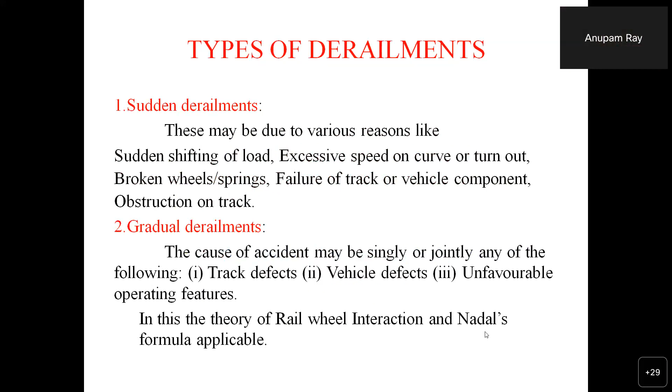So sir has already given a brief introduction about me, so I will also give some more introduction. My name is Srinivas Rao. I worked as a breakdown in charge for about 10 years in Mysore division especially, where we have different stock like MRV, that is ARMV, we have ART, and we have a 140-ton crane. So all these facilities are there. I was the in-charge for the ARMV as a depot in-charge also, and I maintained that stock.

So in railways, as you are aware and attending this class, derailments, accidents happen. Am I audible to you all?

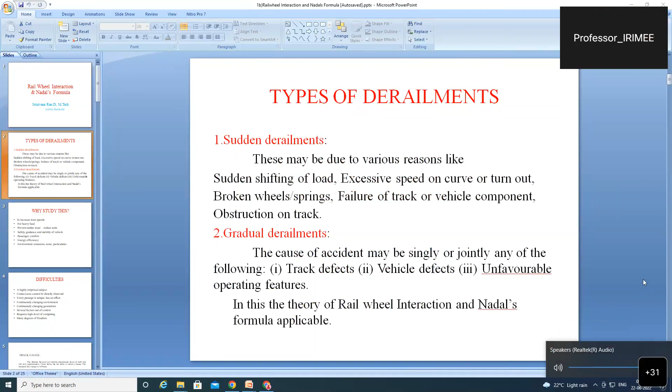Yes sir, audible, but the sound is having noise. Sound is not clear. Please check from your side. Sir, the sound is very clear from your side. Okay, the sound is quite clear. Please mute your microphone, others please mute your mics so you can clearly listen to my voice. The sound is absolutely clear, Mr. Srinivas, please go ahead.

Okay sir, please start. Right, so in our railways, derailment is a common phenomena.

Once a derailment or accident has happened, the next step is the ARME staff has to reach the spot. After reaching the spot, they will form into different gangs. I'm talking mainly about mechanical, so different gangs. One gang of supervisors and staff will concentrate on re-railing work. Another gang, if any passengers are involved in the accident, will focus on their restoration and then producing them before the qualified doctor. This is the work we are doing.

Apart from these two, there is another work called joint readings. Joint readings means the readings at the time of the accident, how they were, and what may be the reason for the accident cause. This is also another important area. Those involved in the breakdown specials, both officers and supervisors, have to concentrate on whether the problem is with the wheels, with the track, or any other issue, which may be a natural calamity or some boulders fallen or any breach.

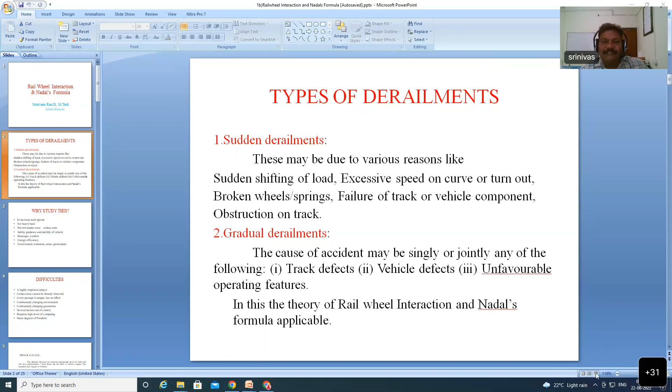So like this, various reasons are there to find out the cause for the derailment. In order to find out a cause for the derailment, everybody must have some knowledge on topics like rail wheel interaction. This is the basic topic we are going to discuss now. It's a basic topic for all engineers, especially mechanical, and any engineer can learn these things perfectly about the derailment phenomenon or cause of the derailment. Before coming to that picture, you must understand minimum basic knowledge on this.

Derailments are generally broadly classified into two varieties: one is called a sudden derailment, another is called a gradual derailment. Sudden derailment means it will not give any clue, it will directly fall.

Due to sudden shifting of load, excessive speed on a curve or turnout, broken wheels or springs, or a track utterly failing, or any vehicle component, or any obstruction on the track - these are all some of the reasons for sudden derailment.

Sudden derailment can easily be identified - what was the reason for this derailment? Many times we can give the prima facie reason immediately for sudden derailment.

But to arrive at the cause of derailment, gradual derailment plays an important role. Gradual derailment means the wheel will mount over the rail table, then move a certain distance, then after that it will derail. So we will have both the point of mount and point of drop.

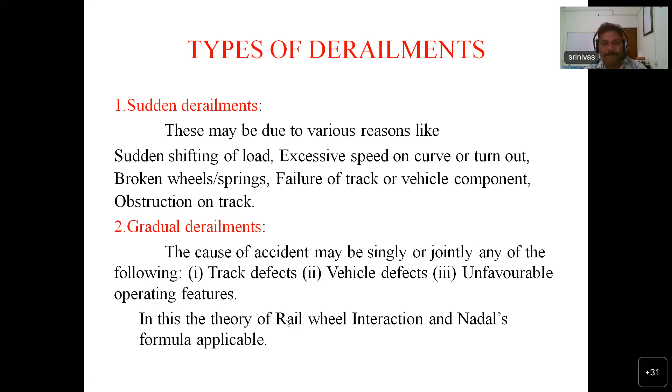What are the effects, how does it come out from the rail table? These things we are going to discuss in today's class. To understand better, you must have minimum knowledge on the wheel and minimum knowledge on the rail also.

For those who already know this, it is no issue - for those who don't know, you may get some additional information. Please try to understand, it will not be repetitive for you.

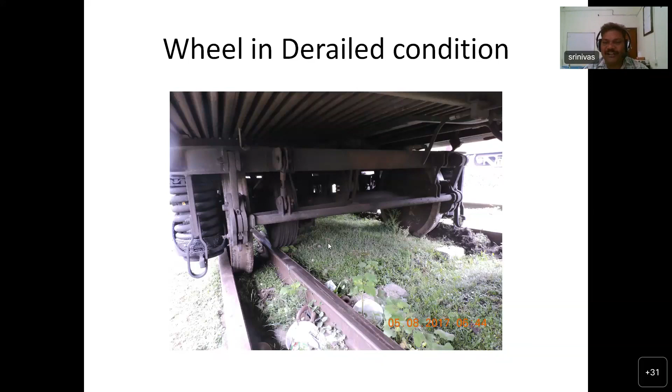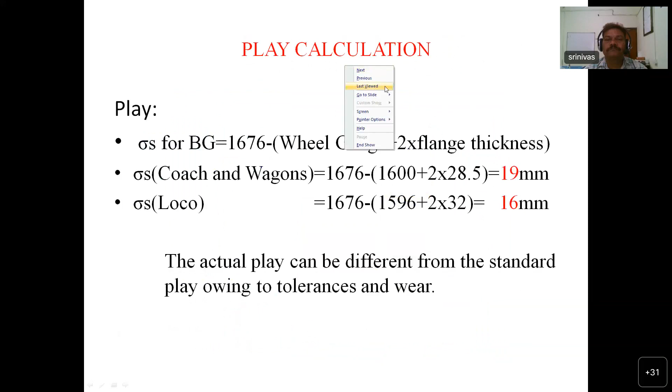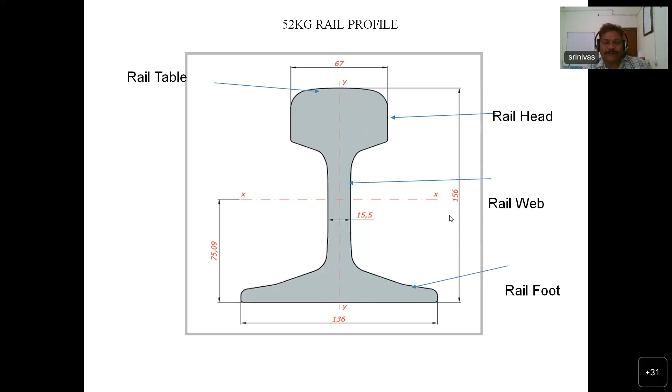These are all flat-footed rail - from the last 20-30 years only we are using this. Earlier there were different types of rails. In Indian Railways we had different varieties, and one important variety we'll discuss now.

One variety of rails is called 52 kg rail - this is the 52 kg rail we are seeing now. But strictly speaking, it's not correct to just say 52 kg - we must specifically say 52 kg per meter rail. That means for a 1 meter length of rail piece, if you weigh it and it comes to approximately 51.9 or 52 kg in that vicinity, then such a rail is called 52 kg per meter rail.

Nowadays the railway board has taken a decision to withdraw these 52 kg per meter rails, and they have started introducing one more type called 60 kg per meter rail. This is the present day trend going on - 60 kg per meter rails are nowadays being used.

So 52 kg per meter rails, if their life is completed, should not be replaced with 52 kg again - they have to be replaced with 60 kg per meter rails only. In 60 kg per meters also, one more modified version is now coming.

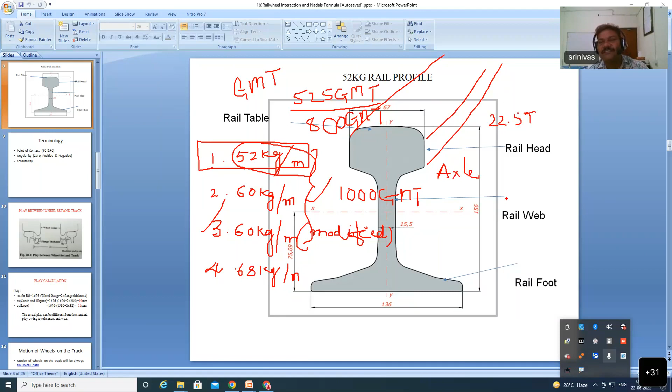One more important point to note is that 52 kg per meter rails have an axial load capacity. They proved it can take only 22.5 ton axial load. But on paper, they give up to 25 ton axial load capacity. There is a paper on this - 52 kg per meter rails cannot withstand beyond 22.5 ton axial load.

I hope everybody knows what axial load is - let me explain again. Suppose you take a diesel engine, the front truck will have 3 axles and rear truck also 3 axles, 6 axles total. If you take one WAG 9 locomotive, the weight is 132 ton total weight, including everything.

Total weight I am talking, including axles, everything. Upon axles, number of axles is 6. So it comes around to 22 ton per axle. That means you can run these WAG 9 locos on the 52 kg per meter track because it is designed for an axial load of 22.5 ton, so safely you can move.

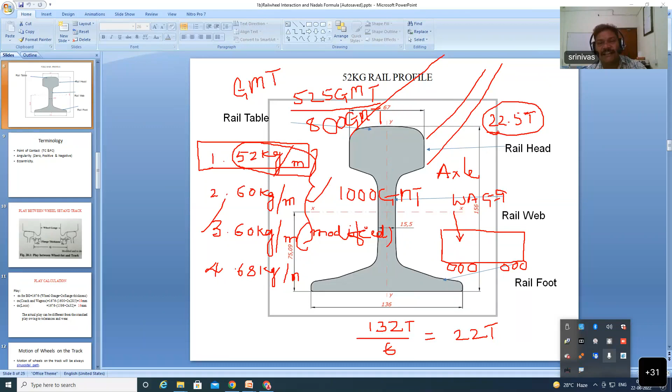Because they are getting doubts as wear and tear and life go on taking place, there are cases of breakage also. That is why they are shifting from 52 kg per meter to 60 kg per meter. This is something like ICF coaches transforming to LHB coaches. So 52 kg to 60 kg per meter - they are transforming, that is the trend nowadays.

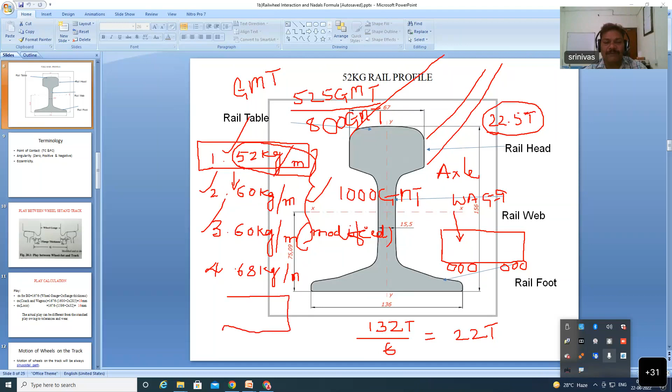Even our wagons also - suppose if you take the example of a wagon, say a box wagon or BCN wagon. The box wagon's empty weight will be roughly 23 ton.

So over this we'll put around 66 ton roughly, so it becomes around 90 ton. That 90 ton will be carried by the loaded wagon, with 2 front axles and rear 2 axles. So 90 ton divided by 4, it will not tolerate this much load. So roughly some 22 point something per axle, so almost we are touching the design capacity of the 52 kg per meter rail. Therefore, sometimes there is a chance of rail breakage or our wheels becoming hot axles. So various reasons come up if you are running almost the designed load.

That is why Railway Board has taken a decision. Hereafter, whatever rails we are providing on Indian Railway track, either for new rails or replacing old rails, we have to adopt 60 kg per meter rails only. So hereafter we will see 60 kg per meter on all main lines. For loop lines and all, 52 kg per meter may still be permitted since their life is still there. So this is one way of understanding the rails - 52 kg per meter, 60 kg per meter and all. I hope everybody is following what I am teaching.

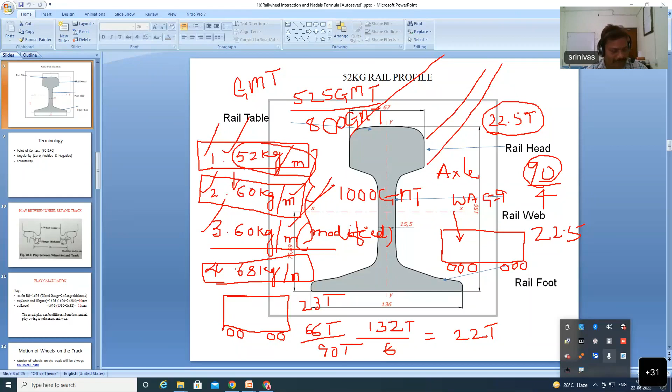So keeping this in mind, what is important for this topic is that you have to understand the various parts of a 52 kg rail profile.

So now I'll call this hereafter as a rail table. This top one will call it as a rail table. The side one will call it as a rail head, this is also similarly rail head. This lean portion, that is called the rail web portion. This bottom portion will call it as the rail foot. So these are the important parameters you have to understand: rail table, rail head, rail web, rail foot.

Then here in the rail head there are also two faces - this is one face, this is another face. These faces also have different names. One is called the gauge face, and the other side is called the non-gauge face. So hereafter I will talk about what is gauge face and non-gauge face.

So gauge face means gauge is measured here only, and also our wheel - for example this is the wheel, this is the wheel - so wheel flange, I repeat, wheel flange will come towards the face of the rail. So that particular face will call it as a gauge face. Where the flange generally sits, the gauge - where the flange will not sit, only the tread area will sit, that is called the non-gauge face. I hope it is clear what is gauge face and non-gauge face.

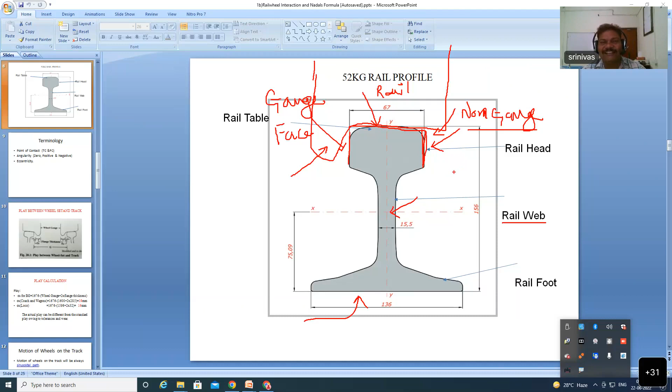Assuming you know what is a gauge face and non-gauge face, how do we identify them by looking at the track? I'll show you.

So in this picture, this is called the gauge face of the rail. This is the non-gauge face of the rail. This is the gauge face. This is the non-gauge face.

Why? Because the flange is on this side. This side is the flange. So for this rail, it will be opposite: the inner will be the gauge face, the outer will be the non-gauge face. So gauge face and non-gauge face should be clear to you now.

First you have to understand what a gauge is and how it is measured, because many of our engineers working in the field are hesitating to join breakdown specials and all. The reason is they are not having much knowledge, many of them. For that reason only I'm telling you.

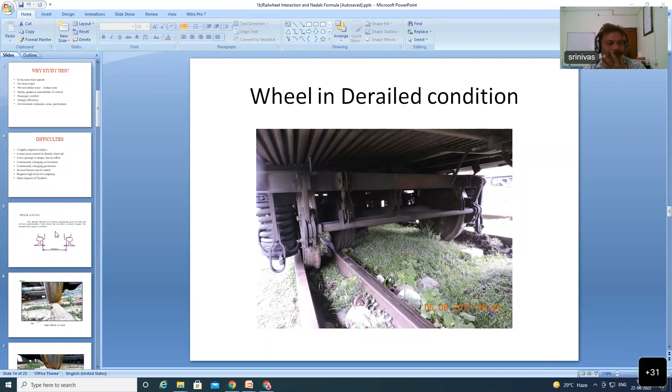So what is a gauge actually? There are two varieties of gauges: one is called track gauge, another is called wheel gauge. First I am talking about what is a track gauge.

Here you have to understand track gauge means this is the rail. You may imagine this is the left rail, this is the right rail. Over this our wheel set is moving. Over this rail, say this is the rail table, and similarly this is the rail table.

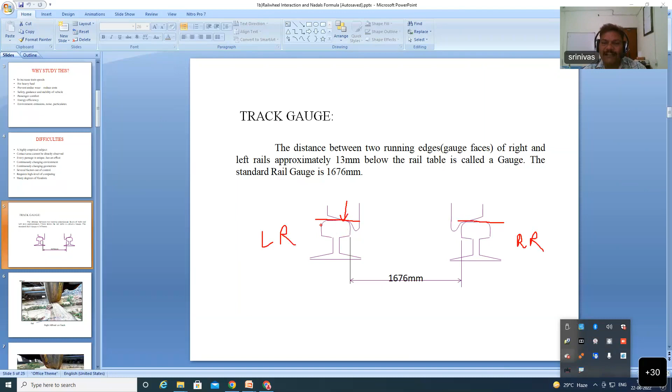From this rail table, 13 mm below, exactly 13 mm, and similarly 13 mm below here. If you make a point at this head area, the rail head area, this is called the inner faces, inner gauge faces.

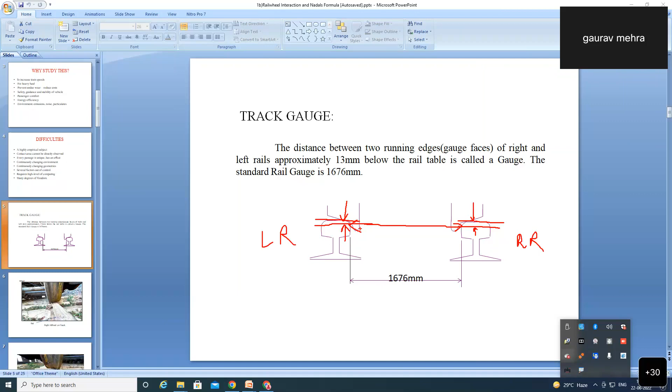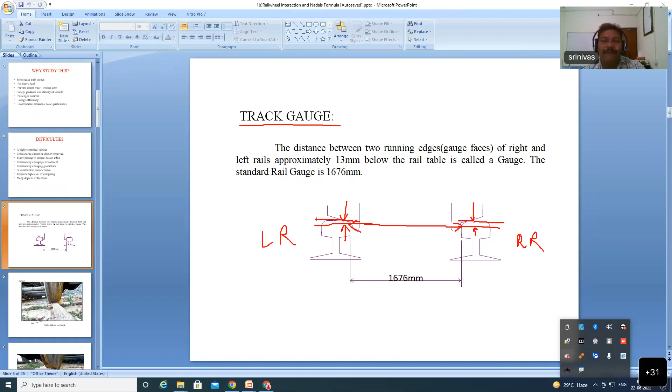I'll repeat. Track gauge - how much is it? Generally track gauge means we'll be discussing broad gauge, meter gauge, narrow gauge and all. Now I'm discussing broad gauge only, not meter gauge or narrow gauge. Whatever discussion is here, I'm making it on the broad gauge. So in the broad gauge, how to measure the gauge - once again I will rub this off and draw it again.

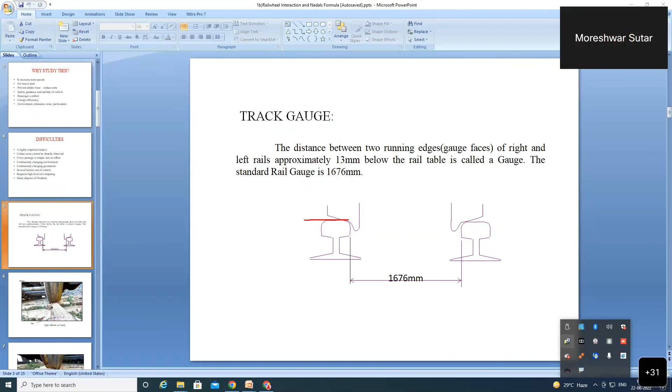Is my annotation visible to you? Whatever I'm writing here, is it visible? Yes, right.

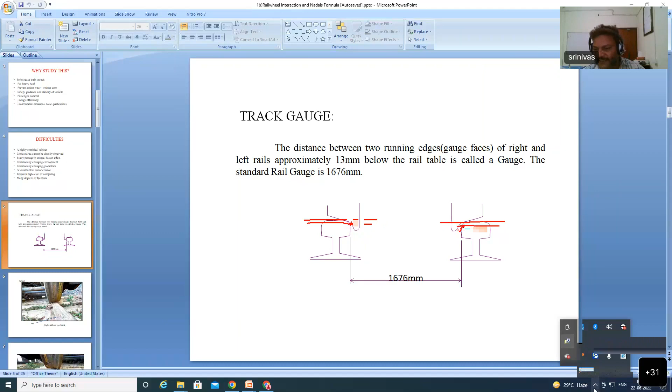So here you draw one line and here you draw one line, just 13 mm below here and 13 mm below here. So you make a point, here one point, here one point. I'll repeat by rubbing this off. Once again I'll mark the point: take a point 13 mm below here, 13 mm below here. Join these two points.

This value must be 1676 millimeters. So on record, this is what they have to maintain - 1676 millimeters is the track gauge they are supposed to maintain. Unofficially, our civil engineers are maintaining even 1673 mm once the PSC sleepers are started, but they are not revealing it. On record, in the books and all, they mention only the gauge is 1676, so here also we'll take it as 1676 only. Off the record, how they are maintaining, we'll leave it to them. So 1676 means it is called correct gauge.

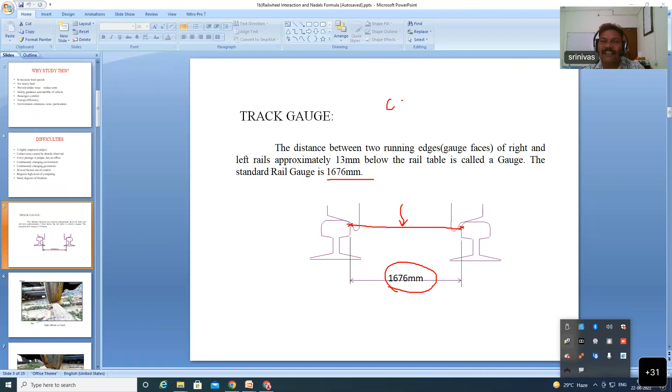Gauge correct means the value must be 1676 mm. If it is there, that gauge is called correct gauge. If it is more, for example say 1680, that means it is more by plus 4 mm, so therefore this gauge will be called a slack gauge. If gauge is more than the standard rail gauge, that will be called slack gauge.

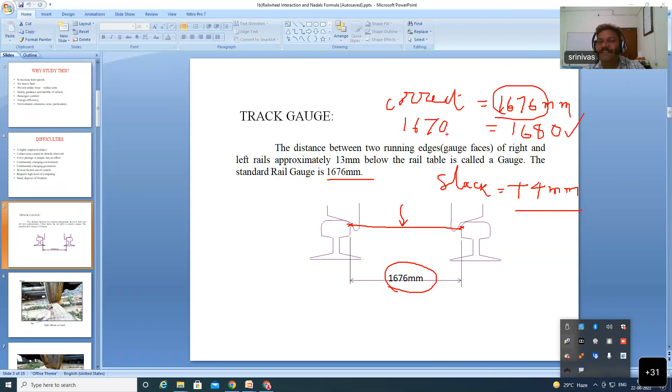Slack gauge means loose gauge, whatever terminology you can use. So slack gauge by how much slack? It is 4 mm. How do you get 4 mm? We are comparing with the 1676 standard gauge. Since we have 1680, it's plus 4 mm more, so it is called slack gauge by 4 mm. Suppose if it is less, say for example you measured 1670, that means minus 6 mm, so this is called tight gauge.

This is called a tight gauge. Tight gauge means it is lesser by some value in comparison with the 1676, which is the standard. So less than this is called tight gauge, more than this is called slack gauge. I hope what is the meaning of slack gauge, tight gauge, and correct gauge is clear to you all.

So correct gauge is 1676. What is the tight gauge? Anything less than 1676, for example 1675, means tight by 1 mm. That's how you have to understand it. So above 1676 we'll call it slack gauge, below 1676 we'll call it tight gauge.

Now in Indian Railways, on straight tracks, the permitted slack is -6 to +6. That means they can give tightness up to 6 and slackness up to 6. This is the permitted range, only on straight tracks.

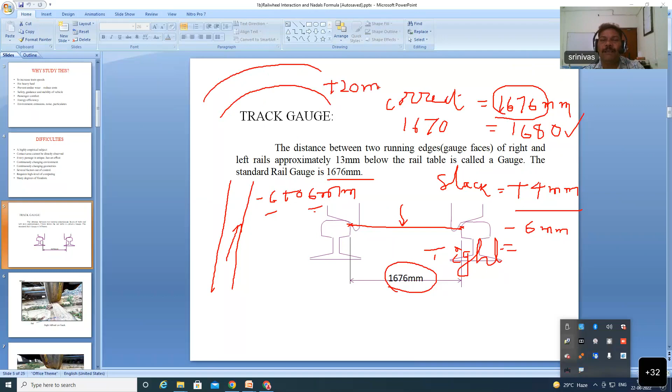On a curved track, this is the inner rail, this is the outer rail. On curved tracks, slack up to 20 mm is permitted. 20 mm slack means 1676 plus 20, so up to 1696 is permitted. Gauges, I hope you understood.

So now I'm able to tell you about what is the track gauge, what is the standard gauge, what is the slack gauge, what is the tight gauge, and what are the permitted limits.

On curve track, how much tight gauge is permitted? On curves, they generally will not maintain tight gauge. If at all maintained, it will be only -6. Normally curves have to maintain slack gauges only, otherwise it will lead to derailments.

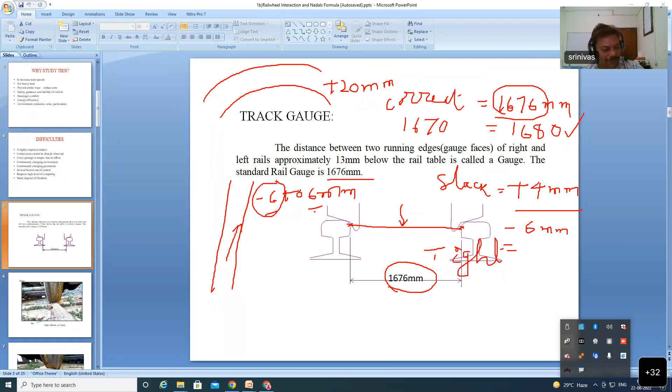I hope it is clear to you, any other doubts? Now I've made you understand what is the track gauge and what is the rail structure and different rails, we have discussed. Now we'll discuss about the wheel also.

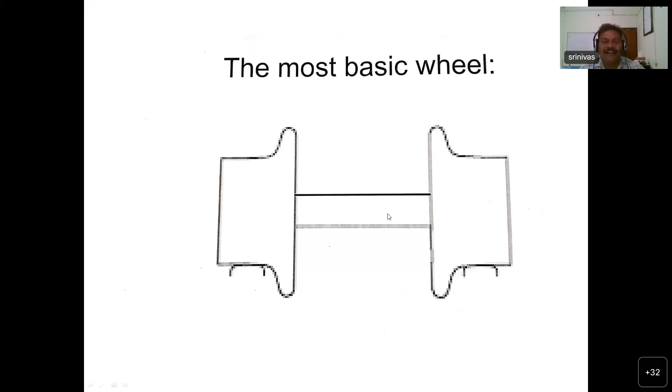This we'll call wheel set. So two wheels will be there, right side one wheel, left side one wheel, and the center axle. This total we'll call wheel set, consisting of two wheels along with the axle, on both sides.

This is called the right wheel, this is called the left wheel. Total we'll call it one wheel set. Once we know what is a wheel set, now we'll discuss what is wheel profile.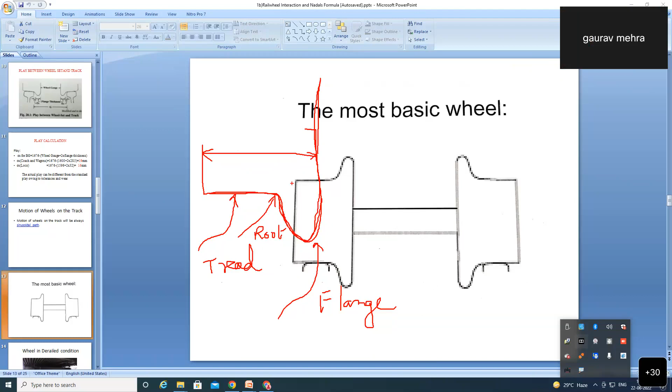Now some more information everybody must know. This thickness, can anybody tell? 63.5 something. Any other guesses? 127, sir. Yes, that is correct - 127 mm. In coaching and wagon, we are maintaining this width of the wheel as 127 mm.

But in the case of a locomotive - I belong to the loco department - we are maintaining 134 mm.

134 mm we are maintaining for this loco wheels and all. Loco wheels, we are maintaining 134 mm of the same value. So actually, initially it was 127 only. So 127 by 2, it will give you 63.5.

So whenever you are asked to measure, in the case of an accident, what is the wheel dia? Wheel dia is to be measured at 63.5 mm place only. You have to measure the wheel dia from this side, okay, this will be 63.5 mm only.

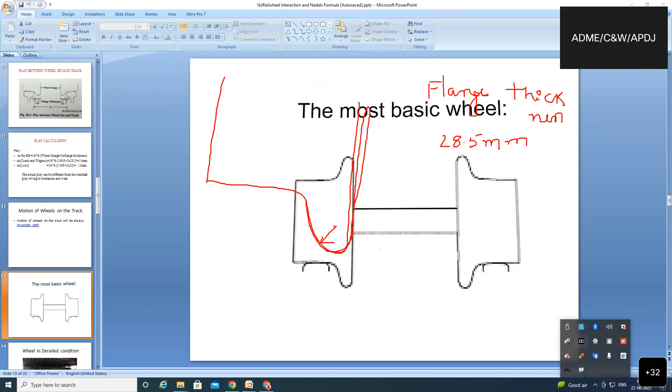13 mm not below the radius, the flange diameter, 13 mm below the tip of the flange. Top portion, say 13 mm below. Actually flange thickness - those who don't have a good concept, please understand. From the tip, this is the tip of the flange. From here you measure the distance 13 mm. Here, say 13 mm here.

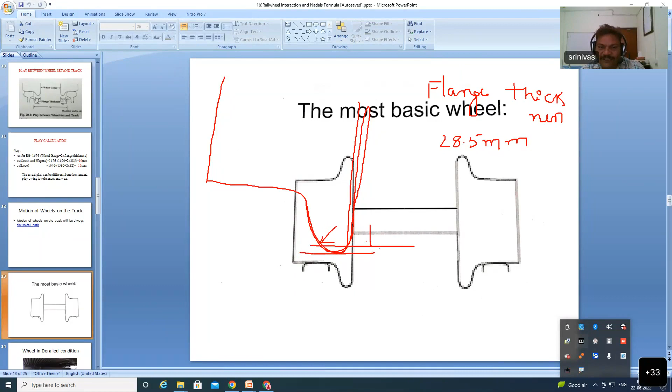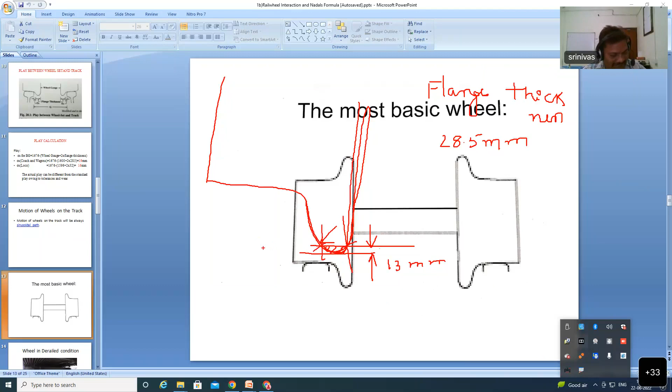This is the 13 mm. If you take a share of this piece, say this one you shear off, so that means imagine only the top piece is available, from here to here only available. So that distance, I repeat, this distance is called flange thickness. I will draw once again so you understand better. So here, 13 mm below. This distance only, flange thickness. This distance only I'm talking about as flange thickness.

In coaching wheels and wagon wheels, the maximum flange thickness we are maintaining, whenever it undergoes the wheel profile, is 28.5 mm. This D value only I'm talking about, that is called flange thickness, 28.5 mm. But in loco sheds, we are maintaining 32 mm, the same value, 32 mm. This is also called thick flange wheels.

Recently this trend has started - recently means last 5 years and all, this thick flange wheels we are starting. This is thick flange wheels.

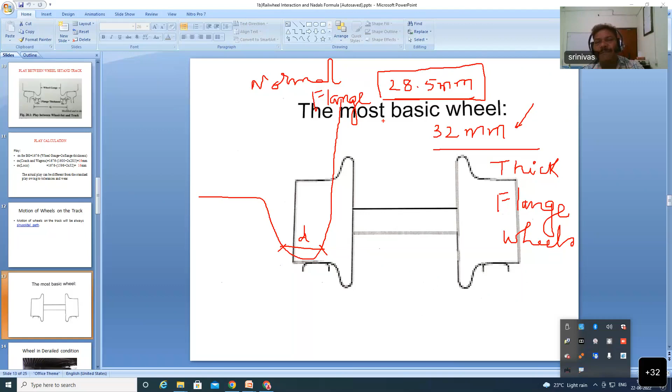Thick flange wheels versus normal flange wheels. Normal flange thickness is 28.5 mm. In coaching stock as well as wagon stock, whenever the wheel is turned, we maintain the wheel flange thickness of 28.5 mm. But in the case of thick flange wheels in loco sheds, we are maintaining 32 mm flange thickness. I hope flange thickness is clear.

Now, from this 28.5 mm newly turned wheel, slowly the flange thickness will become thinner and thinner. So up to how much thickness is it permitted? 22 mm, yes exactly. So this 28.5 mm will slowly reduce, after say 2 months to 28, then after another 2 months to 27.5, then after another 2 months to 27. Like this it will go on reducing the flange thickness until it touches 22 mm.

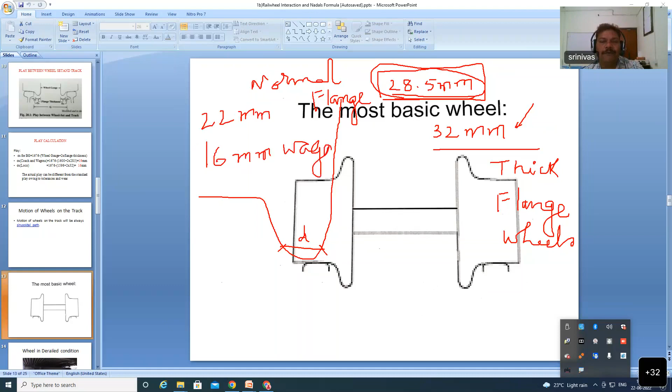For coaching stock as well as loco stock, we are permitting up to 22 mm. At 22 mm or lesser, we have to return the wheels. But for wagon stock, we are going up to 16 mm permitted. For wagon stock this is the limit. For coaching stock, 22 mm is the lower limit permitted. Coaching and loco stock, we permit 22 mm only.

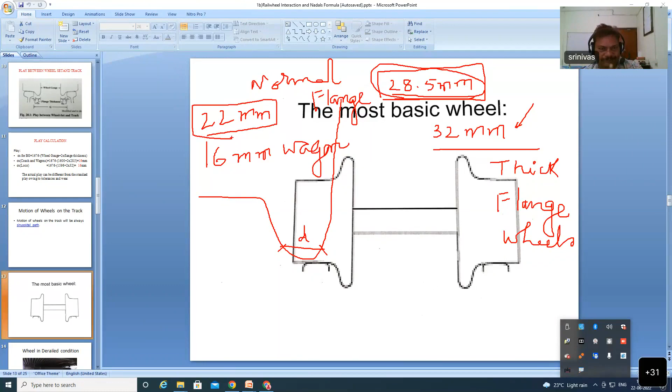I hope flange thickness, where exactly it is to be measured, and the permitted limits, you understand. Any doubts, sir? Right, so now some more data.

So here, if you see, this tread portion, the wheel tread portion, there will be a slope we are maintaining. Can anybody tell what is the slope of this? And here also we are maintaining a slope. Can anybody tell me what is the slope of that area and what is the slope of the flange area? Red area 1:20. This area how much? 1 is to 20, right. 1 in 20 is the slope we are permitting. In the case of a wheel tread area, we are permitting 1 in 20.

Very good. Can you tell me what slope we are permitting here? 1 in 2.5, correct, exactly. So in the flange area, we are permitting a slope of 1 in 2.5. In the case of a wheel tread area, 1 in 20 slope we are permitting. Those who are not aware, please make a note of these things. It is very, very important.

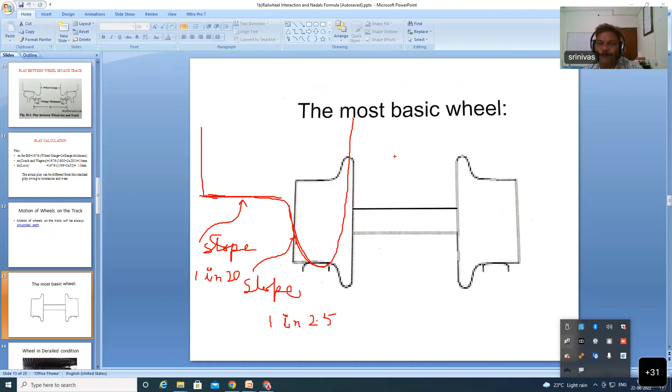Similarly, on the rail table also, as I told you, please see this picture once again. Once the track is laid, I repeat, once the track is laid, you will get a slope of 1 in 20. But rails themselves will not be maintained at this slope. Rail will not be 1 in 20 slope. So this slope, how they attain it is, here they are using sleepers.

Here sleepers they are using. Say this is the sleeper. This sleeper will be maintained at 1 in 20. I repeat, this sleeper will be maintained at 1 in 20 slope. Since over this, any flat rail, when you are placing it, will be tilted by 1 in 20. So that means indirectly our rail is also getting 1 in 20 slope, and wheel is also having 1 in 20. I repeat, 1 in 20 is an indirect way of getting the slope over the rail table. We'll be getting 1 in 20. How? Because once this is placed on a 1 in 20 sleeper, this is the sleeper.

So what is sleeping under the rail, we'll call it a sleeper. Nowadays we are using PSC type sleepers, that is pre-stressed concrete sleepers. Some people call them monoblock concrete sleepers, whatever name you call it. These have become popular nowadays, one reason being to avoid deforestation. Earlier we used to maintain different steel sleepers, wooden sleepers, and all. Wooden sleepers were costly, you have to cut so many trees to insert the sleepers. Nowadays that era is gone, so we are using only PSC sleepers.

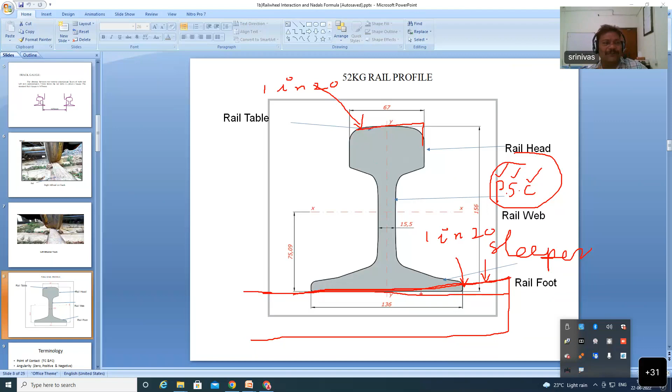PSC sleepers, when they are designed and molded, maintain 1 in 20. It's not the rail that is designed for 1 in 20; the rail automatically attains 1 in 20 once it is mounted over the sleeper. I hope it is clear. 1 in 20 will be there on the rail also, and 1 in 20 slope will be there on the wheel also. I hope it is clear to you up to this.

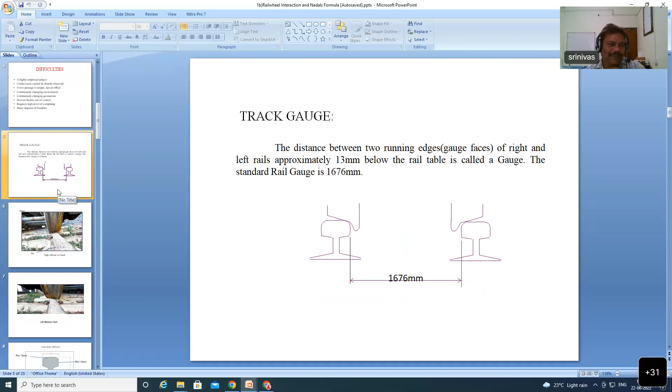So that is the flange area, the tread area, where these two are joining, and this is the root area. This is the rail table. I also told you about this being the non-gauge face and this the gauge face. Gauge face will be there only for this flange. Flange will be there only on the gauge face.

I hope up to this you can understand. Any doubts up to this? Up to this discussion, any doubts for anybody? No, sir. Okay, right. So now we'll go a little deeper into the subject.

Right. So this is the wheel, as I said to you, and this is the rail. Once this wheel is mounted over the rail, this is a normal phenomenon, meaning the wheel will always be over the rail table. It is on the track, you can call it. If it comes out, it is called a derailment or accident, whatever it is. So generally wheel and rail mounting like this is called a normal phenomenon.

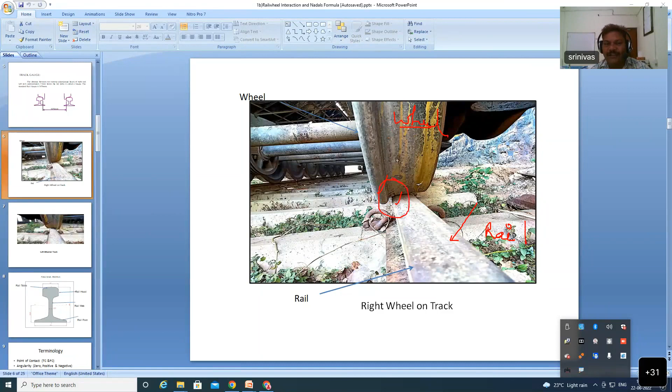So whenever in this normal phenomenon, if you see, between the flange and the rail head, I repeat, between the flange and the rail head, if you observe closely here, you will find some gap. Are you able to see the gap, all of you? I am talking about the gap between the flange and your rail, the rail gauge face as well as the flange thickness area - there is a gap.

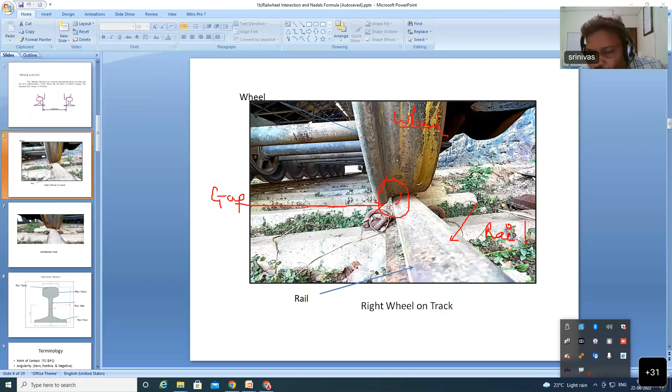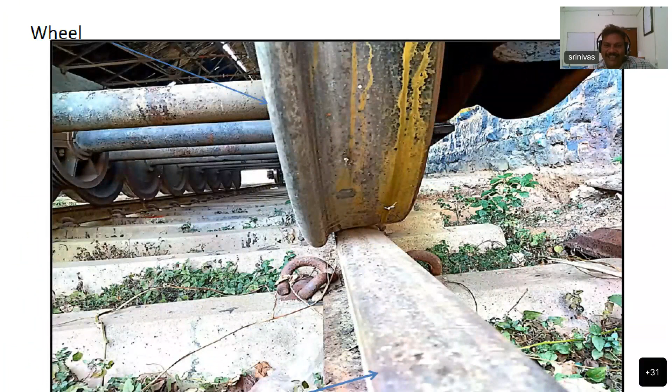19 mm, sir. 19 mm? I'll tell you about that later. Are you able to see the gap, all of you? Yes, sir. Okay. So now I will zoom it a little. Are you able to see it clearly, all of you? Yes, sir. I'm talking about this gap, this gap. Sir, is it 19 mm? I will explain what that amount is.

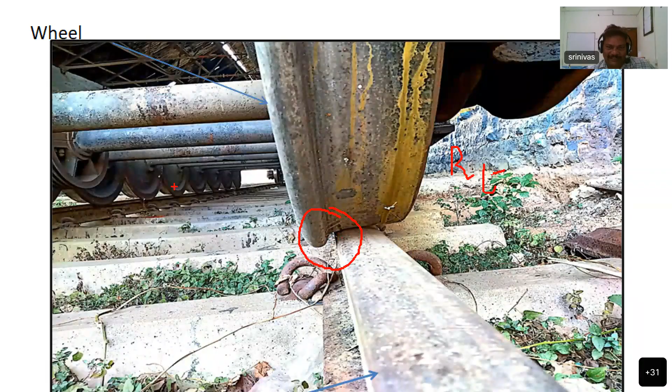Okay, so here there is a gap. Whatever gap is there on the right side, this is called the right side gap. Similarly, I will show you the left side picture too - the same axle, same wheel set, this side. You can see now.

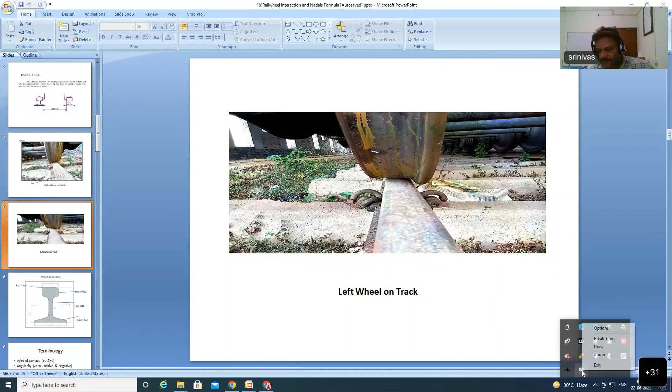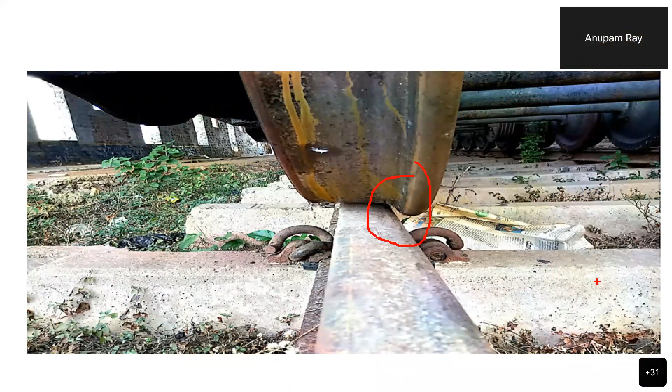This gap, okay. Are you able to see, all of you? Are you able to see the gap? Yes, sir. I will zoom it if you want. Are you able to see the gap here? Is the flange touching the gauge face or not touching? Not touching, not touching. Right, that's only what I wanted. So this we'll call the left side gap.

So hereafter I will use the word 'play'. So this play on the left side, I will call sigma L. If it is on the right side, I will call it right play. So both plays together, how much will it be? Do you know? Anybody knows? Play 9.5 left side, play right side.

How much total? 19 mm, sir. Okay, one side 9.5, and another 9.5. Right, so one of you is telling 19 mm. 19 mm is the right answer. But what is this 19 mm? How did this 19 mm come? I want to discuss this with you for one minute. This is sigma L plus sigma R.

Sir, good morning, sir. Sir, this has just started, sir. So it will continue up to 12:30, sir. Between, I'm giving a 15 minute gap. Yes. It has started, sir. May I come, sir, for 2 minutes? No, sir. May I come and come back again, sir, or may I continue? Okay, right. Good morning, all of you. Just I will take 2 minutes time. Okay, I'll come back and join.